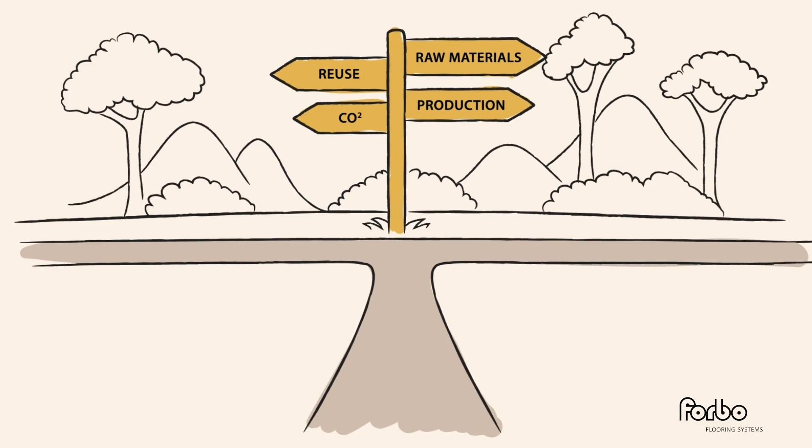Choices are being made every day, but what are the right sustainable choices when it comes to deciding which type of floor covering to use? Let's say you run a new construction project or renovation. With the right choices, you can make a difference in the environmental footprint of your building, reduce your CO2 footprint, control your waste, recycle, reuse, and rethink your materials. With an environmental product declaration for the materials that you use, you can make the right choice.

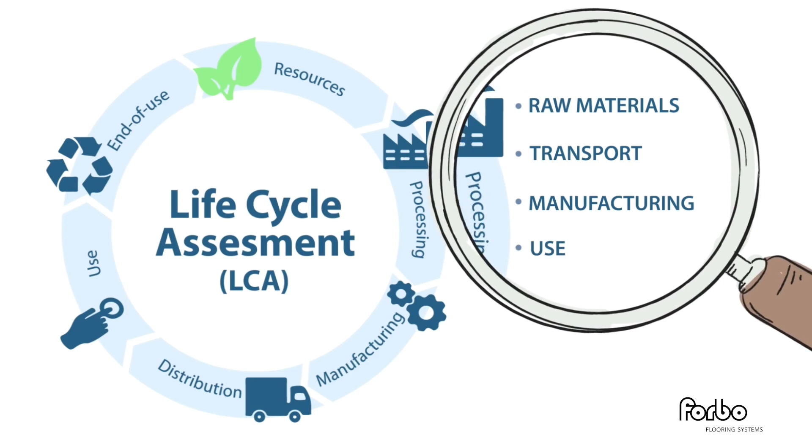But what helps you to decide whether a product is sustainable or not? With environmental product declarations. EPD is an environmental product declaration based on a product lifecycle assessment, LCA. It's a disclosure tool that helps clarify a product's sustainable qualities and environmental impacts, from the cradle to the grave. This way, you make better decisions on which products to use or not.

To set a market-wide standard, this EPD is accredited by a program operator according to ISO 14025 and EN 15804, and is independently verified by a third party. This is what makes our flooring unique. We offer EPDs for almost any of our floor covering products.

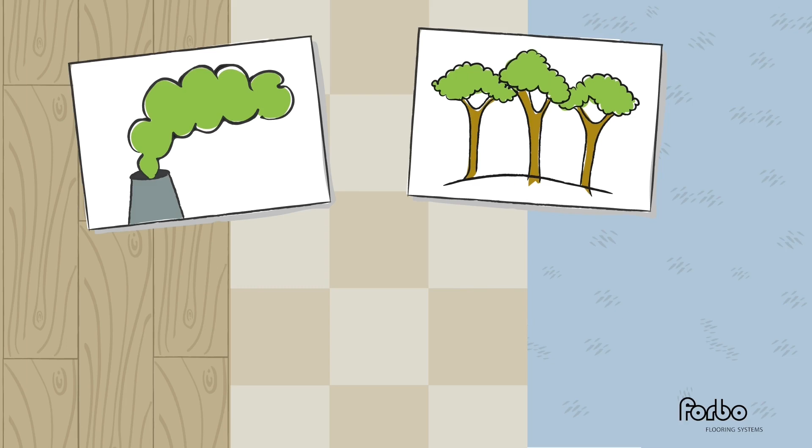An EPD provides information on 7 environmental impact categories, for example CO2 footprint, raw materials used in the product and their origin, the amount of bio-based and re-upcycled or circular used materials, declaration on the amount and type of energy use, and Forbo even provides the impact on human health and ecotoxicity. Furthermore, you'll find info around production processes, product construction, technical product properties, CE-related certifications, fire and safety certifications, and so on. And did you know our marmoleum sheet is produced CO2 neutral and EPD proven?

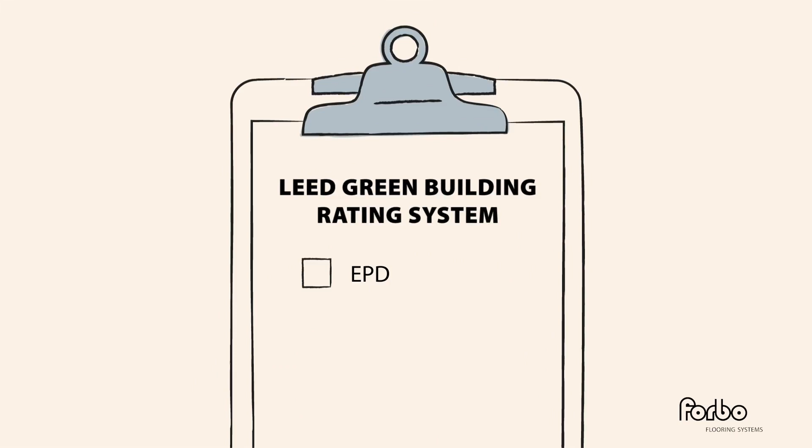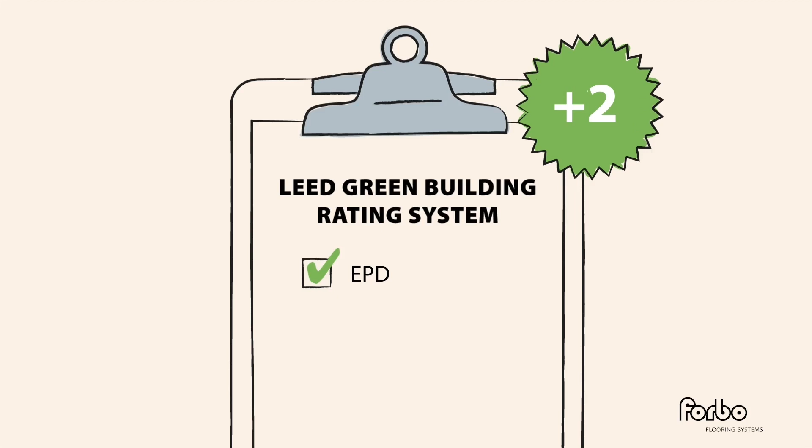In case you want more info about EPD, visit our Forbo Flooring Systems or the UL site. Don't forget that in the LEED Green Building Rating System, products with an EPD can contribute to a maximum of 2 additional points depending on the product selected. And when applying for BREEAM 2018 building certification, one must use products with an EPD only.

So whether you're an installer or architect, a building owner or an architectural consultant, the EPD data is the information that you need. It's transparent, easy to understand, and perfect for building various green certification programs. This way, we create a better environment together, fighting global warming every day, choice after choice. So, what choices did you make today?

Okay, I hope that provided a simpler explanation of what it is that we are going to talk about.

I'm now joined by Amanda Fischer, who is speaking to us live from the Chicago area in North America. Amanda is a business development manager on product sustainability, working with UL.

UL is a global leader in PCR creation and EPD certification. They write: our transparency summaries provide an easily digestible overview of the EPD. This helps enable buyers, building specifiers, and purchasing organizations to quickly review the content and utilize it in their projects. Your EPD report from UL has been thoroughly investigated and verified to meet our scientific data.

That's what you do, Amanda. You check whatever it is that we claim and say. Is that so? Yes, it is. Okay, yes.

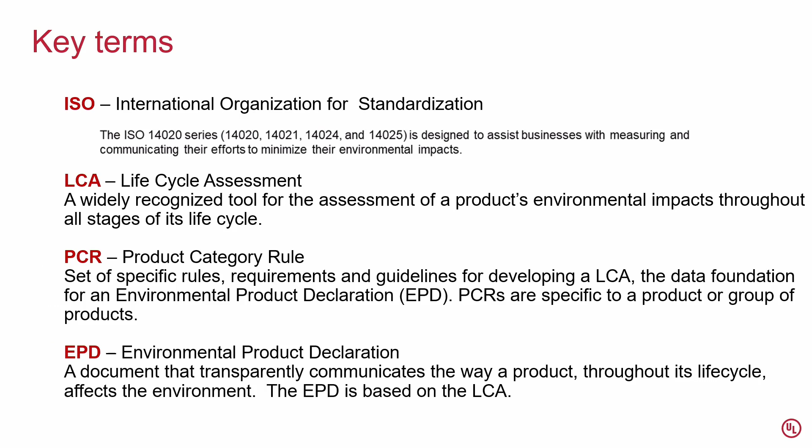They create and publish a number of standards. They have the ISO 14020 series of standards, designed to assist businesses with measuring and communicating their efforts to minimize environmental impacts.

Keeping that in mind, I wanted to talk a little more about environmental labeling. Environmental labeling allows companies to share the environmental aspects of their products. I thought this fact was pretty powerful: more than 60% of architects and designers are looking for hard scientific data on products specified in their projects, as well as effective tools to compare sustainability performance that underpins credible certification.

I think this really drives home the importance of environmental labeling to specifiers. So a little more about environmental labeling: there's mandatory labeling and voluntary labeling. Mandatory labeling includes things like information disclosures and hazard warnings. A good example, at least from the US perspective, is FIFRA, which has mandatory pesticide labeling.

On the other hand, we have voluntary labeling, which is really standardized by those ISO standards. There are three different types of environmental labeling under the ISO standards: type 1, type 2, and type 3.

In the interest of time, I'm really going to just focus on the type 3 labels here today, which is what environmental product declarations fall under. Type 3 eco labels provide quantified environmental data on a product. They are life cycle assessment based, and verified by a third party, like UL, as a program operator, but there are other program operators as well, such as IBU, International EPD, EPD Italy, etc.

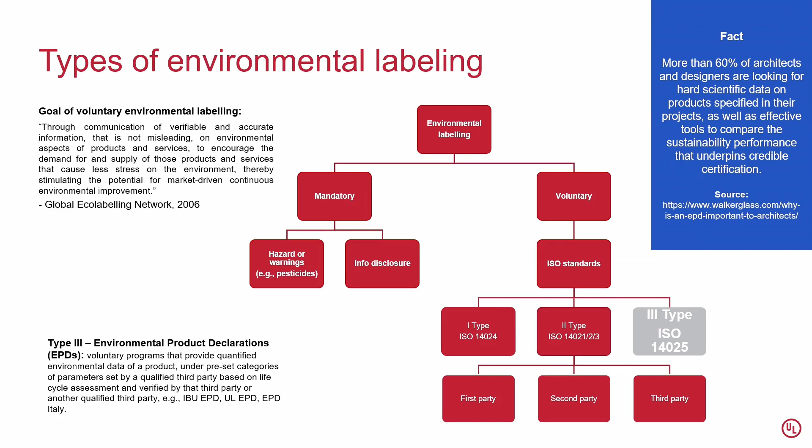ISO 14025 is the specific standard that covers type 3 environmental labeling, and I'm going to talk about that a little more on this next slide.

And finally, there's the program operator, and that's UL's role — we are a program operator. I'm going to be talking a bit more about the program operator responsibilities in the next few slides. But let's talk about the certification process at a high level and what that flow looks like.

The first step in certifying an EPD is determining the correct PCR. Each product needs to fall under a product category rule. If there isn't a PCR for a product, then one needs to be created before you can make an EPD. You can't make an EPD without having a PCR that covers the specific product you're trying to get the EPD for. Once the appropriate PCR has been selected, the next step is to conduct the life cycle assessment study.

This study uses the parameters of that PCR. That's typically done by the LCA practitioner or in-house capabilities by the manufacturer. Once the LCA is complete, the program operator will verify the LCA study. That can be done by the program operator themselves or one of their approved external verifiers.

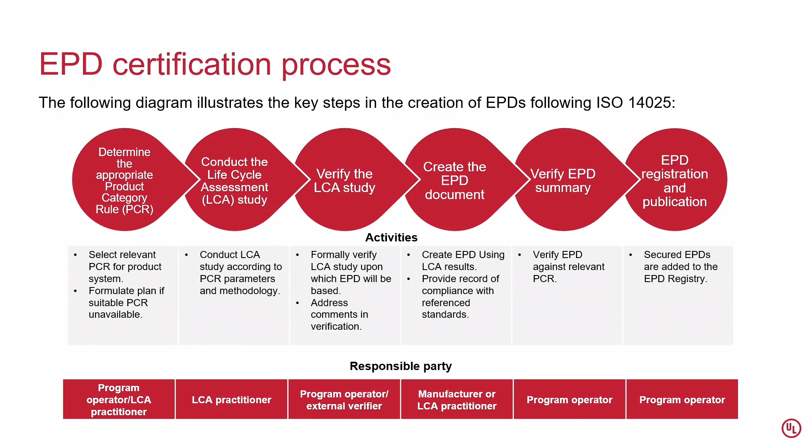For UL, our EPD database is our SPOT database where you can find all of our EPDs. So you see a number of steps here that are the program operator steps. I'm going to dive into that a little bit more. As I said, UL is a program operator, and I wanted to explain a little bit more what that means and why it's important to the EPD process.

ISO Type 3 declarations require a program operator to oversee the development of the EPD following the ISO requirements. So what does that mean? What are our responsibilities? One is that we have to have program instructions. We have to have guidelines that explain how we do our process. We need to revise those documents, those procedures, those guidelines as necessary. So if the ISO requirements are updated, we need to update our program documents accordingly.

We need to make sure that all the type 3 labeling requirements are met. If we are a PCR creator, which UL is, we do write PCRs. We need to have procedures that explain how we establish those PCRs. And then when we create a PCR, we need to publish those PCRs and make them available. We need to make sure that there's procedures that prevent the misuse of our marks and logos, so people aren't out there using them in a way that's illegal or pretending they have something that they don't.

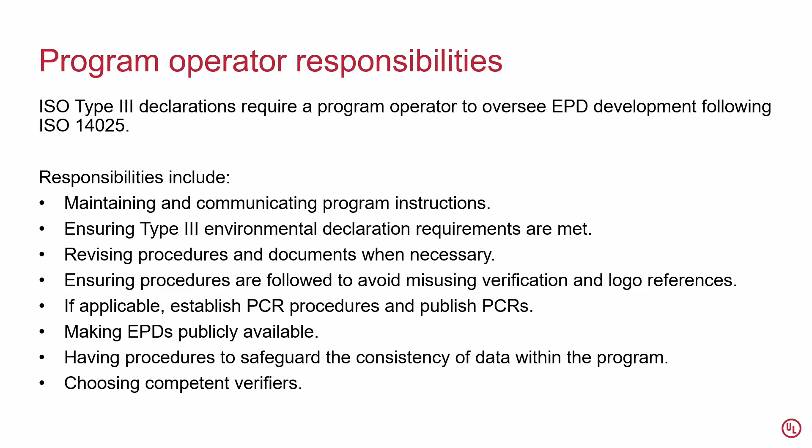We also need to make the EPDs publicly available so that any buyer, architect, contractor, or specifier can find them. We need to make sure that we safeguard the consistency of our program. And then finally, making sure that the verifiers we use are competent, whether that's an in-house verifier or an external verifier. So those are the general program operator responsibilities.

And if you remember the flow chart that I had shared on the EPD certification process, the first step was selecting the correct PCR. There's a variety of organizations that publish PCRs, typically program operators. A lot of the program operators have their own PCRs. And each of us program operators, we do not need to use our own PCRs. We can use any PCR that's out there in order to create an EPD.

So your product does need to fall under the scope of a PCR. And if it doesn't fall under the scope of a PCR, then one needs to be created before the EPD process can move forward, before the LCA really can be done. What does that process look like? So I've put here a flow chart of what UL's process is.

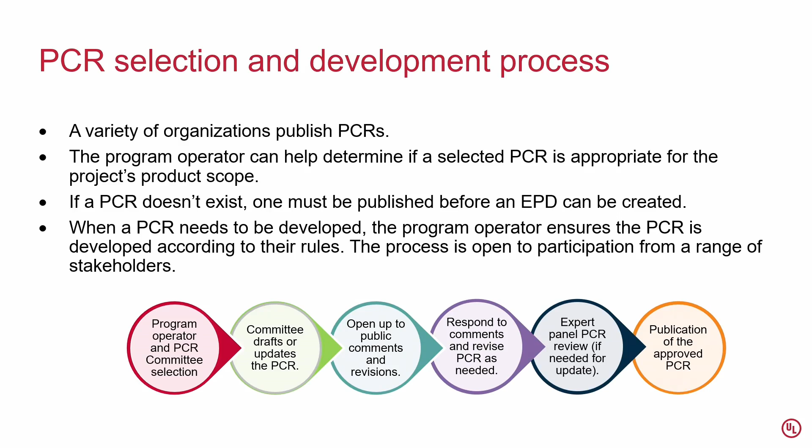The PCR is created by a committee. It's not just created by UL, it's an open process that is open to participation from a range of stakeholders — users, manufacturers, it could be regulators, certifiers, it can be LCA providers. They can join the committee, and then that committee drafts the PCR. The PCR is then open to public comments, and then the committee responds to those comments and revises the PCR as necessary. Finally, an expert panel reviews the PCR and updates it if they need to, and publishes that PCR. And when updates are needed, it follows a very similar process with that same committee.

So once you have a PCR in place that covers the product for which you're trying to get an EPD, the next step is to create the LCA. The LCA needs to be created according to certain criteria. There are 2 ISO standards that establish how LCAs should be created — ISO 14040 and ISO 14044.

The LCA also needs to meet the requirements of the applicable PCR. If you have a construction product, there is a core PCR, ISO 21930, that the LCA needs to meet as well. For Europe, that would be EN 15804.

That's the LCA process. The LCA is created in accordance with those requirements, and then it comes to us for review. We do our review via a matrix, a verification done via a matrix of all the criteria and all those standards.

It's quite a complex process where we look at all the criteria and consider things like: do the products fit the scope of the PCR? Does the LCA follow the system boundaries required by the PCR? Does it use data that fits the parameters of the PCR, and were the calculations performed correctly?

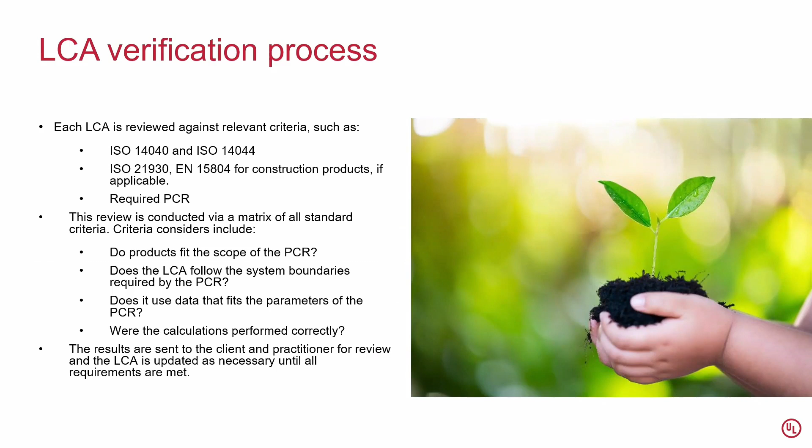Once that review is complete and the LCA is compared against all the required criteria, we'll go back to the client and tell them if any updates are needed. We'll go back and forth until the LCA is updated and meets all of the necessary requirements for verification.

Once the LCA is verified, the EPD can be drafted. The EPD is typically drafted by the manufacturer, or it may be drafted by the LCA practitioner as well. Once it's drafted, it comes back to the program operator, so UL in our case, for verification.

We do that review very similarly with a matrix. It's a spreadsheet that contains all of the applicable criteria required for an EPD, including requirements from ISO 14020, which covers environmental labels in general, and ISO 14025, which we already discussed, which specifically covers environmental product declarations.

If it's a construction product and falls under the core PCR of ISO 21930, it'll need to meet those requirements, or perhaps EN 15804 in Europe, as well as the applicable PCR. And then finally, our program requirements. Each program operator has their own program requirements, and the EPD needs to meet those specific requirements from our program or the applicable program operator's program.

So as part of that process, if there's any editorial or compliance issues discovered, the EPD is returned to the manufacturer and practitioner, and it needs to be updated, just like the LCA, until it complies and meets all of the verification criteria.

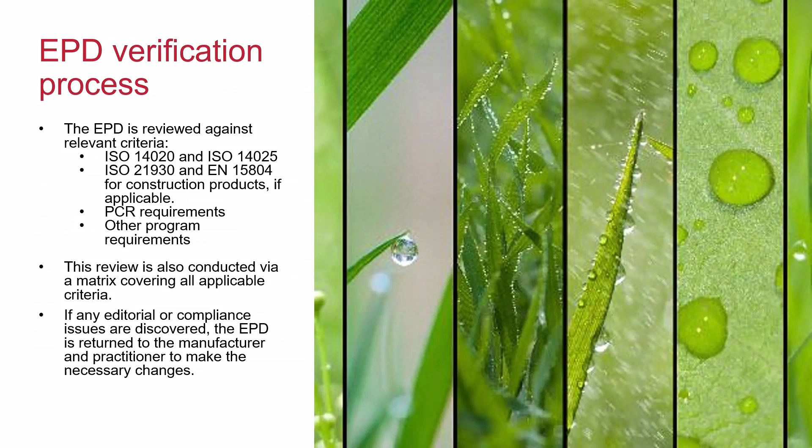So once the EPD and the LCA have both been verified and they meet all criteria, the EPD can be certified, and we register it.

So what that looks like is you get an EPD certificate. The EPD certificate goes up into our EPD database. And each program operator has their own database. Ours is the UL SPOT database.

All of our environmental labels that have been approved are up in that database. What's great about having that database is it's easily accessible by buyers, by contractors, architects, anybody that needs to access and find your environmental product declaration.

And then finally, for marketing purposes, you can use our certification badge to show that your product has been evaluated and has an environmental product declaration for it. It references our website so people know where they can go to find the EPD.

So that's an overview of the certification process for an EPD, and specifically UL's part, the program operator piece, and what we do as part of that.

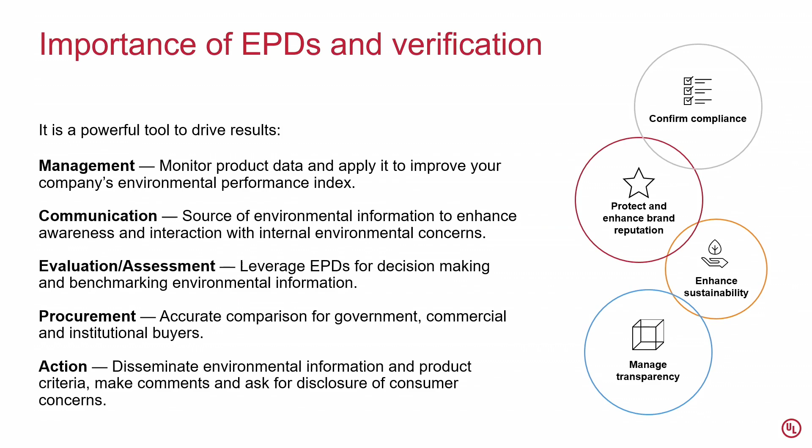So when you have UL or another program operator certify an EPD, it helps ensure consistency in the EPD document. It makes sure the EPD complies with the applicable requirements, and it helps take pressure off of the company seeking the EPD by giving them the resources they need to get it done right and protecting their brand by reducing potential errors with the EPD.

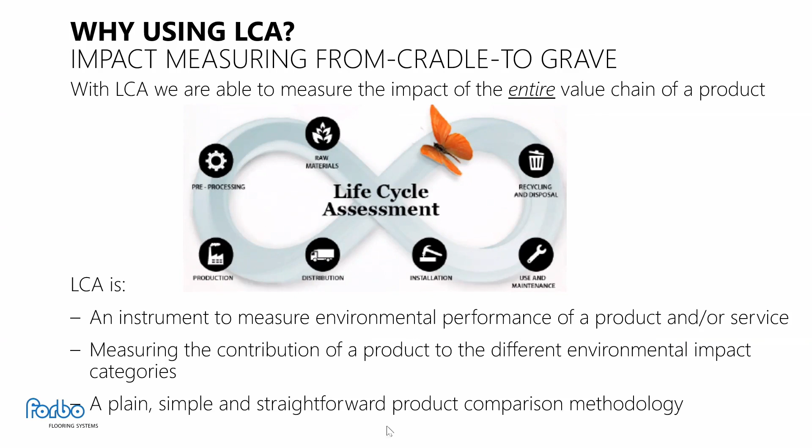What that means in reality is that if you look at the impact of a product across the value chain, from raw materials to distribution to production to use, and you also look at the various methods of how these phases of product creation and use impact the environmental impact categories - global warming, acidification, eutrophication, they're all mentioned here - then you have a complete view of what a product actually has impacts on in those environmental categories.

I realize these categories might not be that clear for all of you. Of course, global warming is the topic of today, but whoever has been around in the 80s, acid rain was the big topic. So acidification has all to do with that.

Eutrophication has to do with the quality of water - we want to make sure we do not pollute water sources as part of creating a product. Natural resource depletion speaks for itself, as does solid waste and ecological toxicity. We don't want to influence human, plant, or animal-based atmospheres with toxic products.

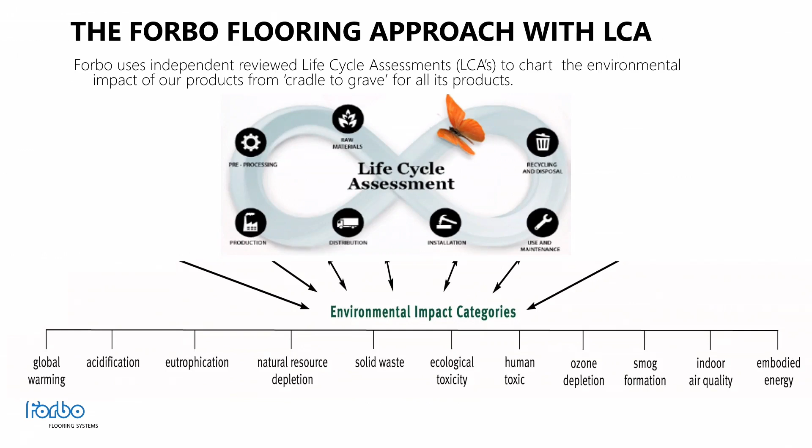Ozone depletion is a topic that is always an important area. Smog formation, indoor air quality has very much to do with the inside environment, really important for people, and embodied energy, where you talk about the impact factors.

So it is really a holistic perspective. What is considered is a very brief overview of how we look upon it from Forbo.

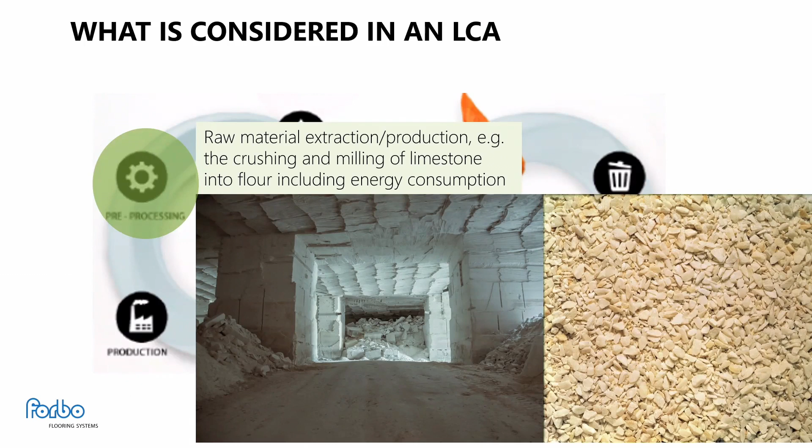We have a situation at Forbo where we do pre-processing, and pre-processing in our world today means we extract raw materials from the environment. In this case, as an example, we mill limestone into flour, which is an additive into our floor covering. You need to add that part of your LCA to understand the impact this has from an energy standpoint and all the categories you saw before.

For raw materials, it's everything related to getting the raw materials to our manufacturing plants, and making sure you process them in a proper way. Of course, the impact of that is also measured.

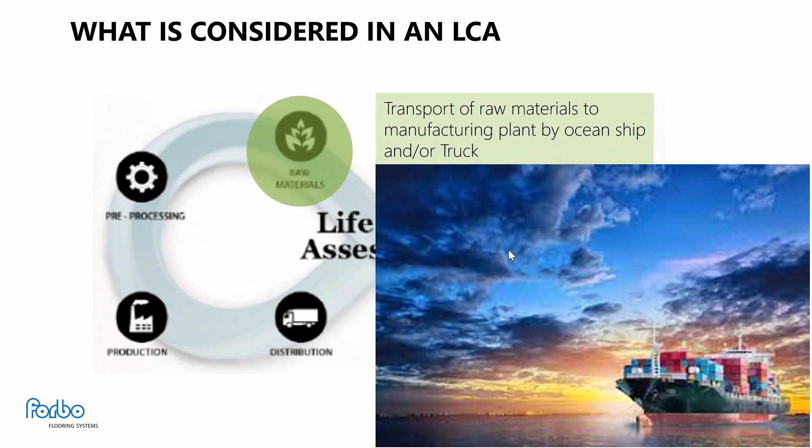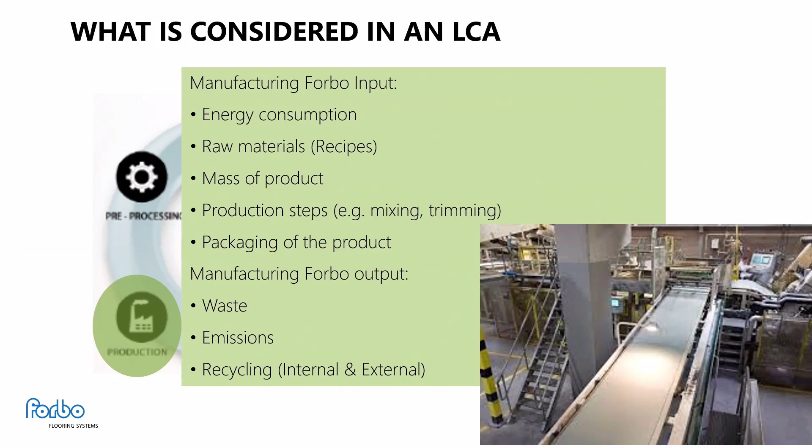When it comes to production, where all the raw materials come together, there are many different inputs and outputs that are considered and calculated as part of the LCA. It's about energy consumption, raw materials, mass of the product, production steps, packaging, but also on the output side we talk about waste, emissions, and recycling. In other words, it's a real holistic perspective.

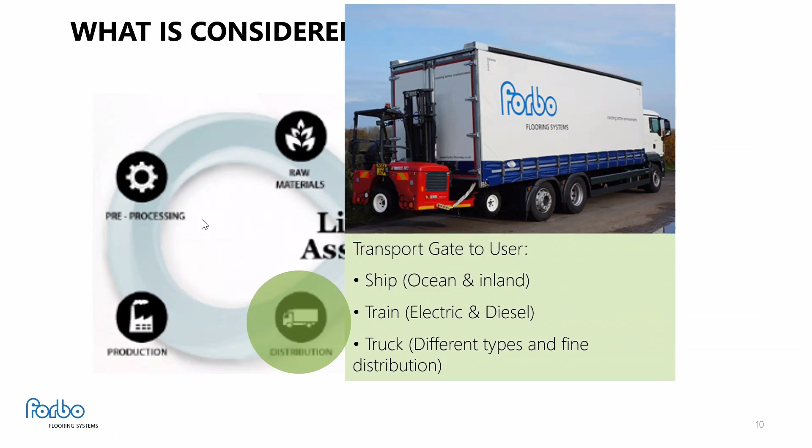When the product is finished, we ship it somewhere - it can be by train, ship, or truck. Of course, that uses fuel and covers distances, both inland or electric or diesel, and all these things are being considered.

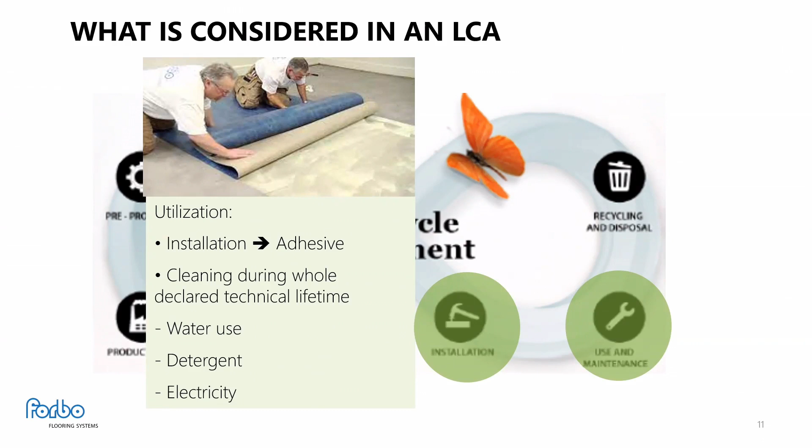In the phase where our users get involved - our customers, installers, but also the end users - we also attribute or allocate what the impacts on the environmental categories are on utilization topics like installation. The adhesive has a role to play if there is one involved. But also cleaning and maintenance is an important topic to factor in, where water use, detergent, and electricity are all factors that can influence your LCA performance.

And last but not least, recycling and disposal has to do with what you do with the end-of-life situation. If there are situations where you remove a floor with a machine, electricity is something you're using, and that is impacting the environment.

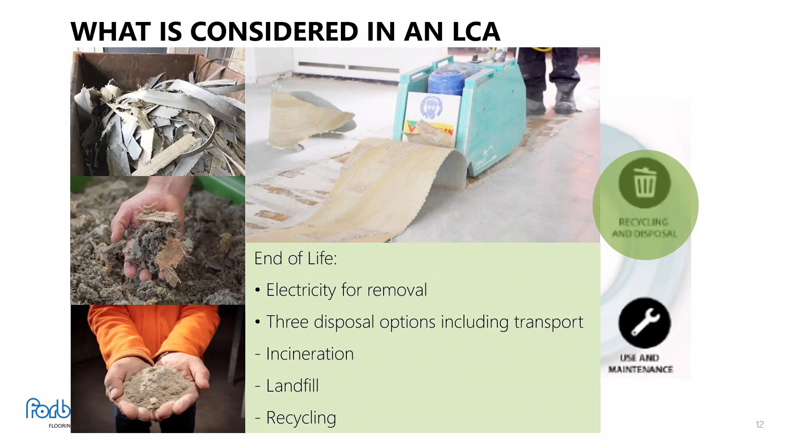But also in disposal of the product, incineration, landfill, and recycling are all options that you need to create scenarios with to ensure you have the full picture. But all that, of course, makes a pretty complex situation. If we talk about Forbo's perspective, there are many other manufacturers of floor coverings that do it somewhat differently. So it's a challenge to compare one product to another, but it's definitely not impossible, and there are some variables that determine the LCA outcome.

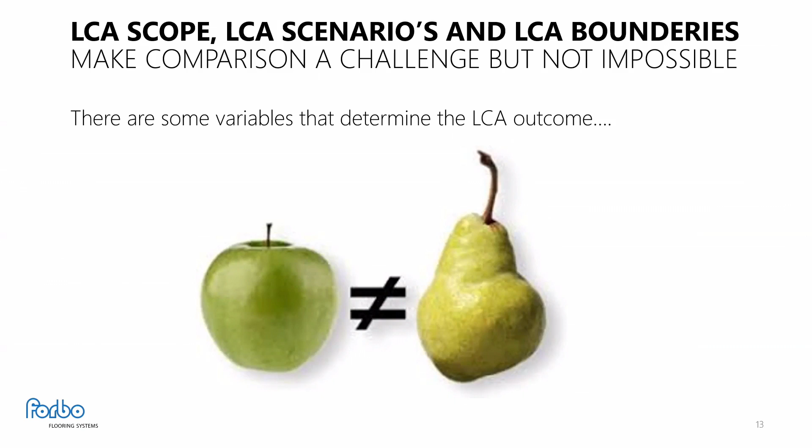You saw in the previous presentation from Amanda that there are standards - ISO standards and PCR, the product category rule. But the very first variable you can ask yourself as an evaluator of products, if you want to select a green product, is first ask yourself the question, what is the...

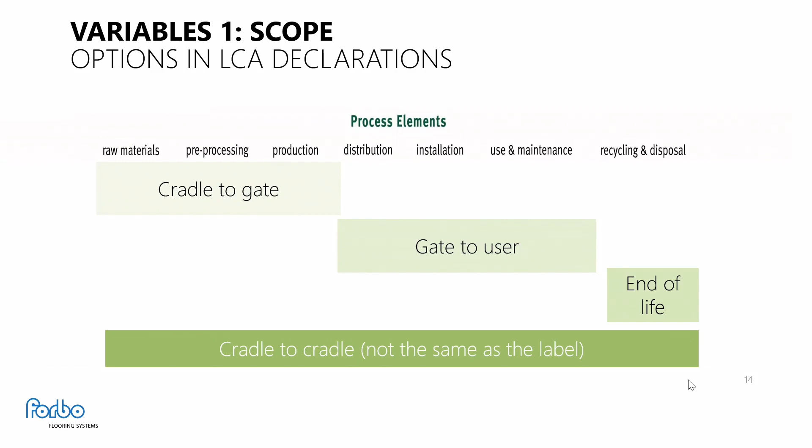variable in terms of scope? There are LCAs where you can declare products from cradle to gate, which is just the 3 stages of the production process. You can also review from gate to user, the phase where the use phase is a very lengthy process that has a particular impact on the environment. Recycling and disposal, end of life, is of course the last phase. But when we talk about the full process from raw materials to end of life, the cradle to cradle approach is an important scope for the whole of the LCA. In all our LCAs, and most LCAs, cradle to cradle principles are utilized for assessing the impact on the environment.

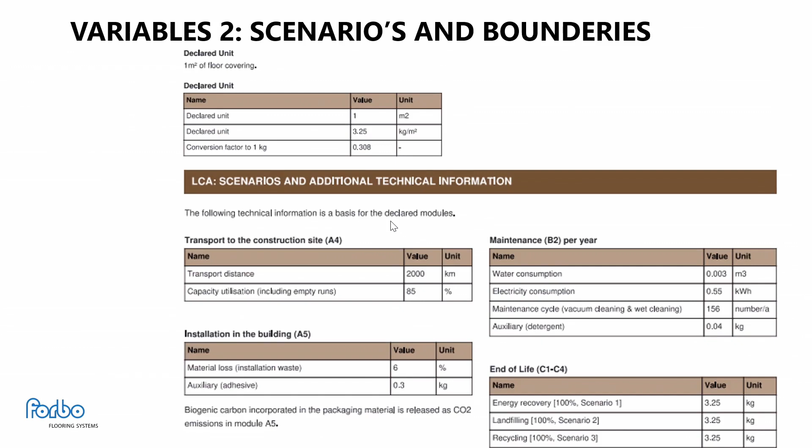In this case, there are 3 scenarios: energy recovery, which means it is incinerated and generates energy again, landfill, and recycling. So all these components are variables that, if you start comparing, need also to be compared before you get to the outcome of an LCA.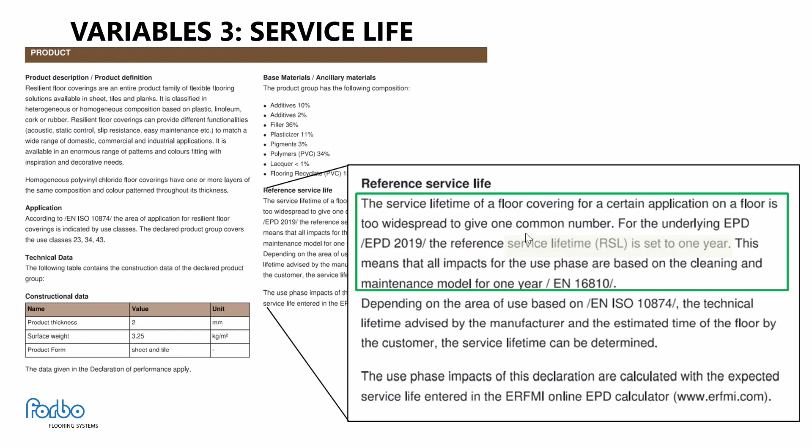Last but not least is service life. In this case, you can see the pre-description of the EPD, and the service life is mentioned as 1 year. In most EPDs, most LCAs, it is set to 1 year because the service lifetime of floor covering for a certain application is too widespread to give a common number. So often it is just 1 year.

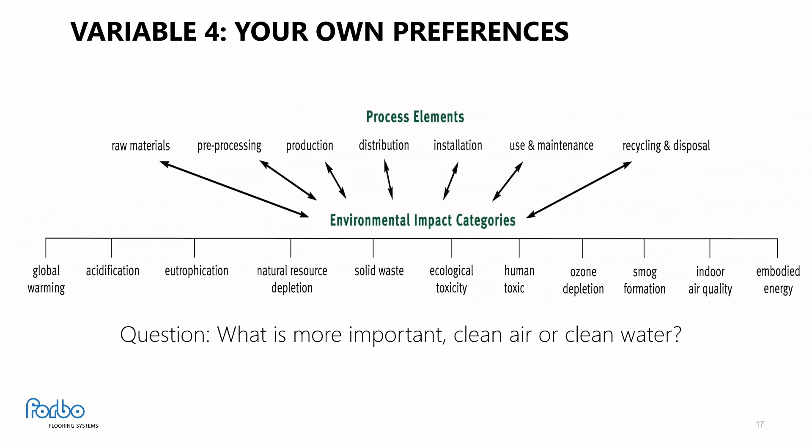However, there is a very important variable as well. Once you have considered all the variables, there is the question: what do you think is more important? Because at the end, it all has weights in these modelings. If global warming is the most important topic for you, that's the topic you need to look for and assess whether the variations being used are sufficiently addressed.

If I take global warming as the example here, I will elaborate on that in the next slide. LCA is therefore, for many manufacturers, a tool to improve their performance on LCA, once you have set the parameters right.

Then we have a 68% decrease realized in the period 2004 to 2020.

So in principle, that means that LCA is a very handy method. But for users, customers and end users, it is important to know that LCA methods cannot by default be compared. There are differences, as I already mentioned, in the four different ways of looking at it.

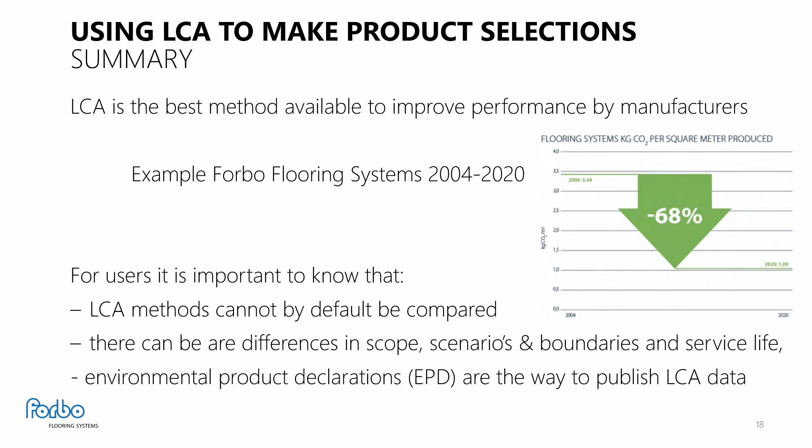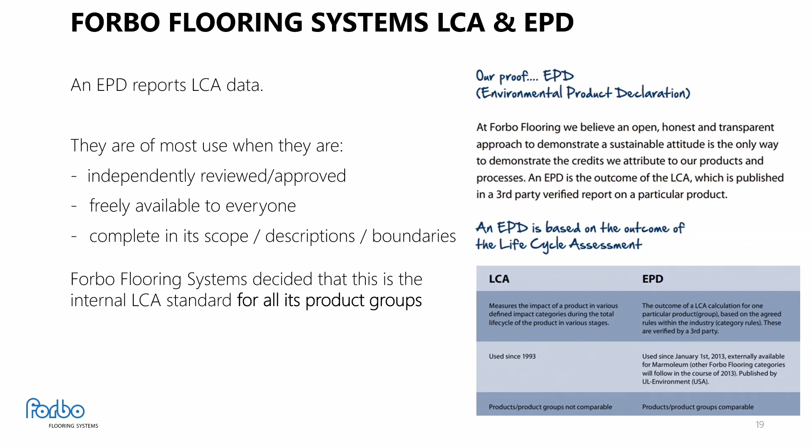But environmental product declarations are always a good way to look at LCA data, as Amanda already explained. At Forbo, we have EPDs that show all the product groups on our website, independently reviewed, because that's the last step to make it real and accurate—reviewed by a third party. So it's not a self-declared statement, because checks need to be made to ensure the scope setting, descriptions, and boundaries are all set properly.

An EPD looks like this. There are many categories. You can see a full description of everything we've covered here—the life cycle data, but also the recycled content, the cutoffs—all those points are mentioned in there. So how do you compare EPDs?

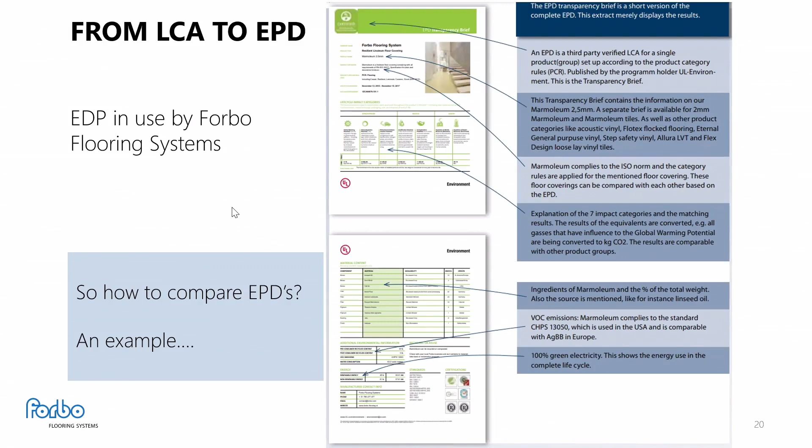Well, comparison is, in our case, relatively easy. As long as you make sure that the standardization methods are similar, you can start comparing based on the scenarios being used. Forbo uses the standards set by the European Resilient Flooring Manufacturers' Institute, which Willem already mentioned—the institute that drives standardization across the industry.

On their website, they have an EPD calculator. What's handy with that calculator is that for every product category, a customer can download a PDF of an EPD, and that looks like this. This is the EPD I've been using before in my presentation, where it's clearly stated for the whole category—in this case plain and decorative linoleum, as an example.

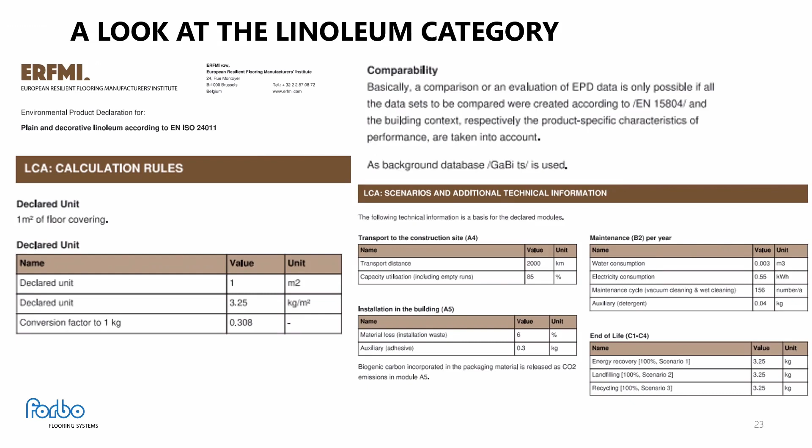It's the same for every different resilient category, where standardization has been done for the whole category for all manufacturers in Europe. The detail is really in that document, in much more depth than you can see in the presentation. I don't want to cover it all, but just to give you an idea: the various stages of production are coded by names like A1-3, A4, all the way to end of life. The impact categories are written on the vertical side.

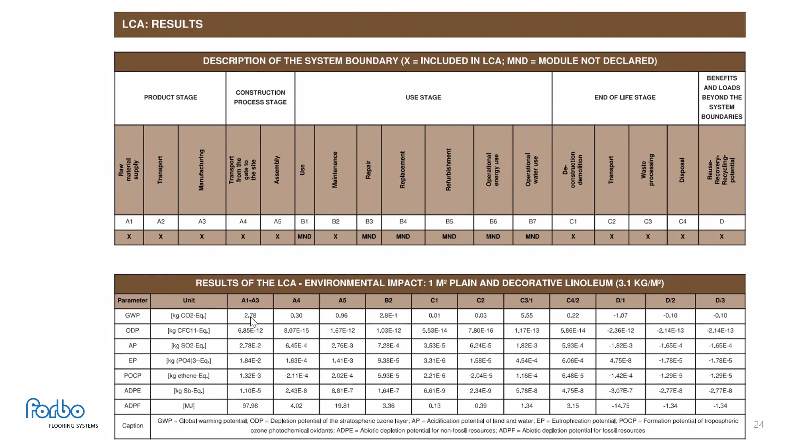You can see what the impacts are—in this case, global warming potential. The statement here is that the category of linoleum, in the sourcing to production phase, generates 2.78 global warming potential.

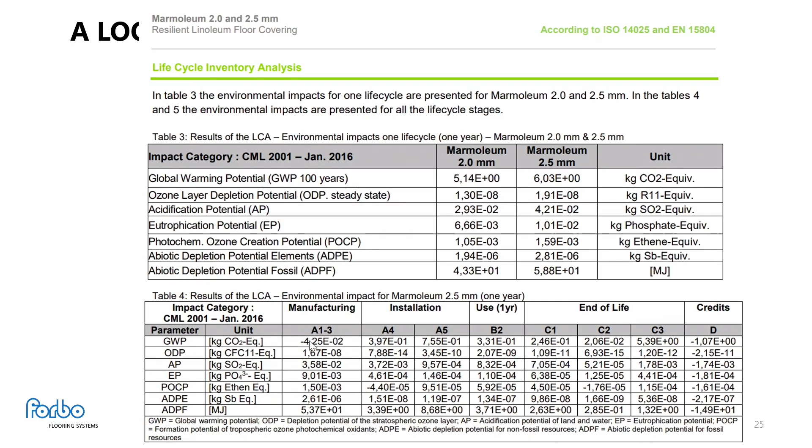So how do you then compare? This is an EPD of Forbo, which has exactly the same table as in the previous slide. Here too, horizontally, are all the phases in production and use, and on the vertical side, the impact categories. You can see again the global warming potential of this individual product.

What's interesting about marmoleum is that it's made of 97% natural raw materials, which means the product actually absorbs CO2, or global warming potential, in its LCA. That means it has a minus 42.5 grams per square meter CO2 performance.

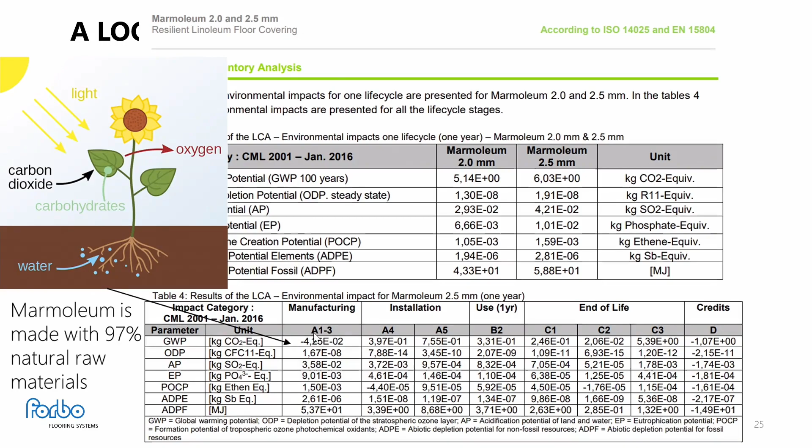If you start comparing, comparing is just laying the two layers on top of each other. This is the industry standard, and the top one is the Forbo standard, where the individual product can be assessed against the category group from the industry. The industry is declared at 2.78, as mentioned, but the individual product here has a much lower score compared to the regular industry.

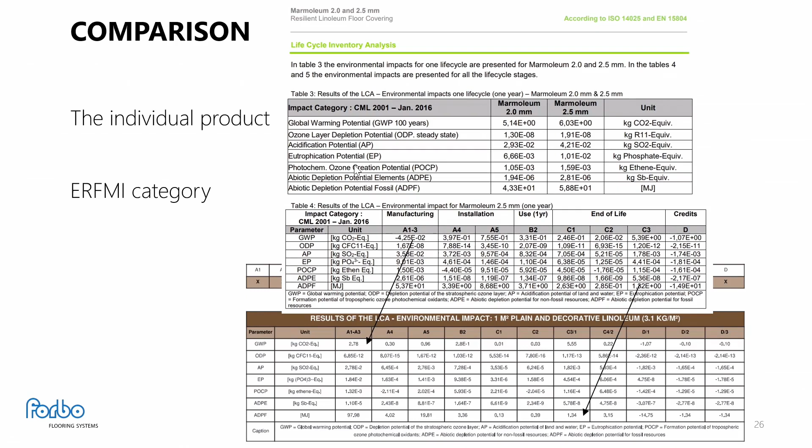You can do that for every part of the whole LCA. Another example is the last phase, end of life. The scenarios are more or less the same, so the impact is more or less the same as well, meaning the scoring is the same too. These are fully comparable, because before I looked at four different variables on that individual product to see if there were any differences, and there were not.

So the future of EPD and LCA is really about making selections, enabling customers to make the right decisions based on LCA. On top of that, LCA and EPDs—which is how it's reported to the outer world—already cover all these impact categories. In the future, ecotoxicity and human toxicity will also be declared in future EPDs.

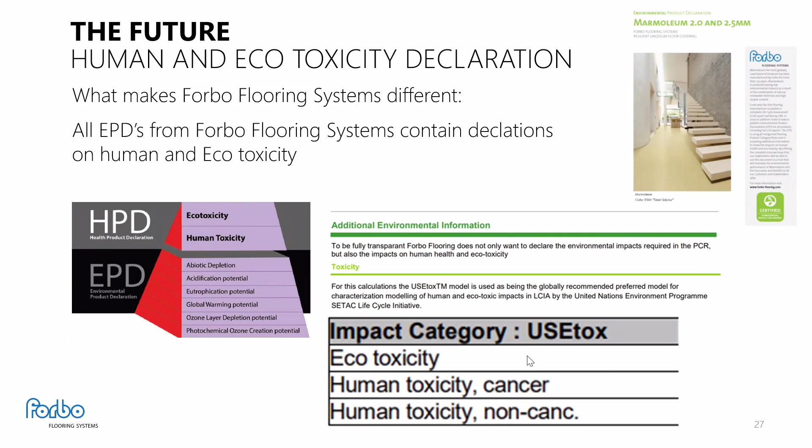At Forbo today, all the EPDs already have these eco and human toxicity declarations included, which is an extra guarantee that you're ready for the future in that sense.

So where can you find them? In any of the download centers related to the products that are on offer. This is not only at Forbo, it is at most of the suppliers in the flooring market. I would invite you to look at an EPD, download it, and see if you can make sense out of it based on the presentation I just gave.

There's another place which was already mentioned by Amanda, which is the spot where much more products than just Forbo flooring products are being presented - the SPOT platform of UL, where all the products can be found that have been individually and independently reviewed by UL.

This is my last slide. What I really wanted to leave behind is that product comparison is not easy, but when you know what to look for, the 4 variables I mentioned make comparison easier. It is still a world that requires people to really pay attention.

At the end, I think it's also really important to state that there are 4 disciplines of any company that, besides LCA and EPD disclosure, have to do with reduce, reuse, recycle, and renewable. As long as you use these principles in your environmental policy, your LCA and EPD results will show better and better over time. The LCA is an excellent tool for our customers, but also for ourselves to improve over the years to come.